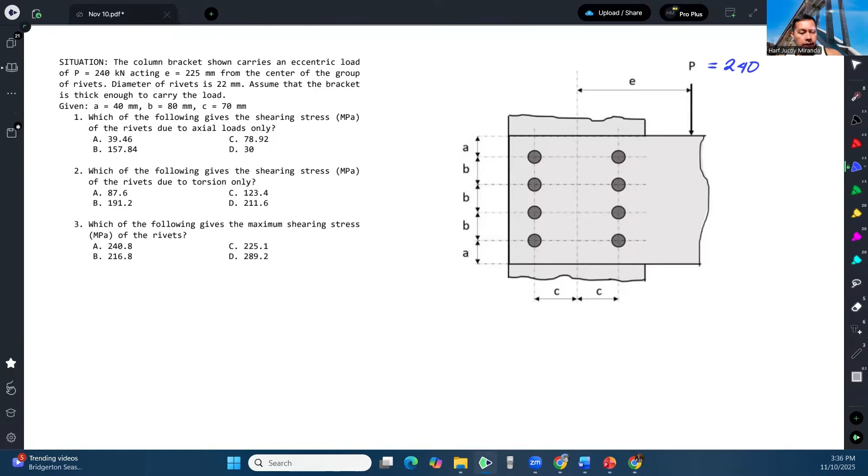All right, situation: the column bracket shown carries an eccentric load of 240 kilonewtons acting at an eccentricity E of 225 millimeters from the center of the group of rivets. So let's plug in the values: P is 240, E is 225. The diameter of the rivets is 22 millimeters.

Assume that the bracket is thick enough to carry the load. This statement simply means that we do not need to check the bracket itself against bearing, tension, or other limit states of the steel member. So for this particular problem, we will be focusing only on the rivets.

We are given A equals 40, B is 80, and C is 70.

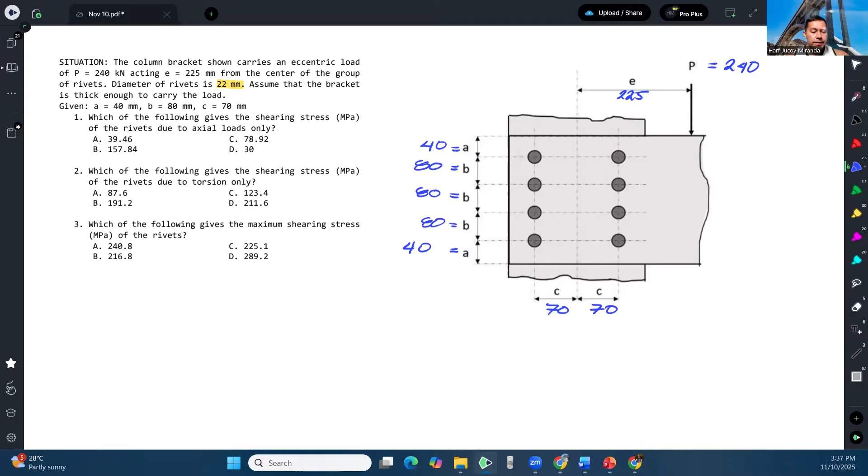For the first question: which of the following gives the shearing stress in megapascals of the rivets due to axial loads only? So what we need to familiarize ourselves with here is that first of all, these rivets have a bolt group centroid.

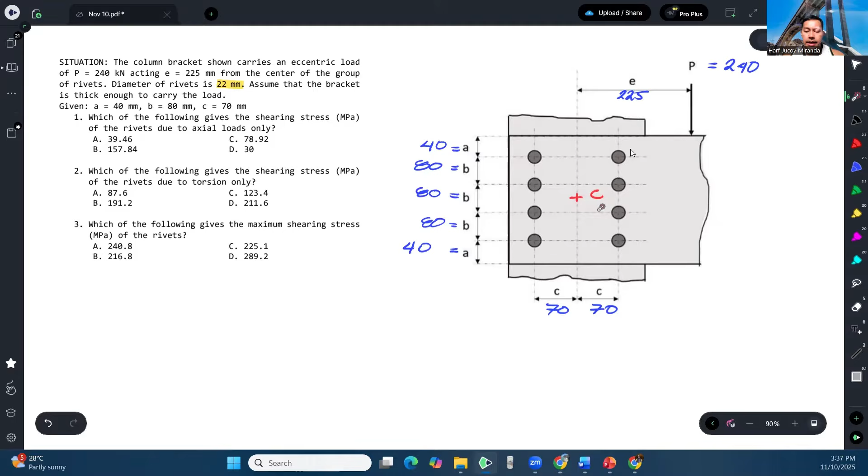And that centroid, because of symmetry, can be found here. So there's the centroid of the group. Because the centroid is there, then any distance from that point to wherever the force is applied gives us what we call the eccentricity. So eccentricity, remember, is always measured from the center of the bolt group.

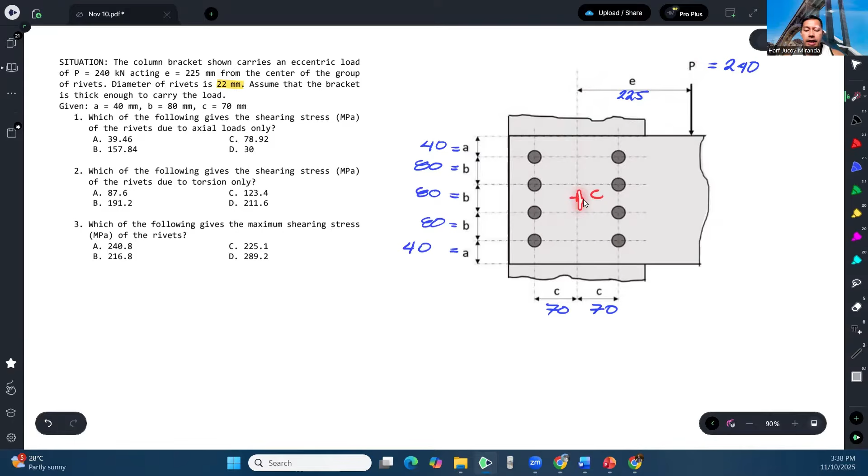Now, just in case the bolt group is not symmetrical, you can apply Varignon's theorem to determine the location of the bolt group centroid. Hopefully we are familiar with that. But anyhow, in this case, since the center is there, the distance from here up to here is our eccentricity.

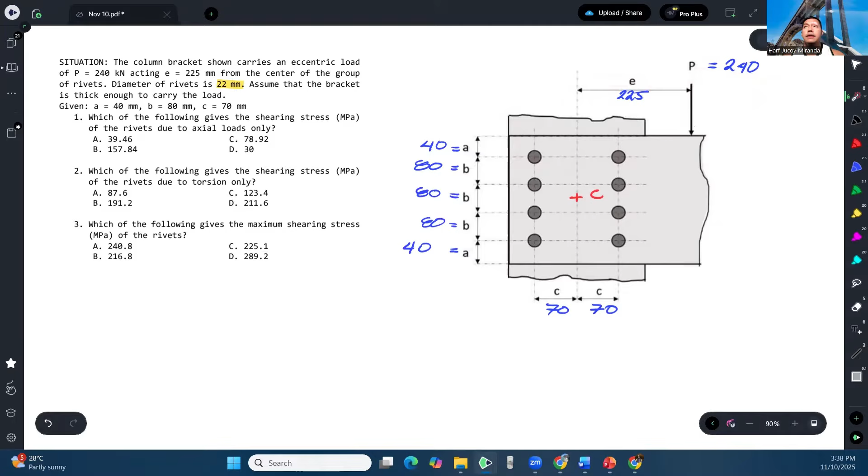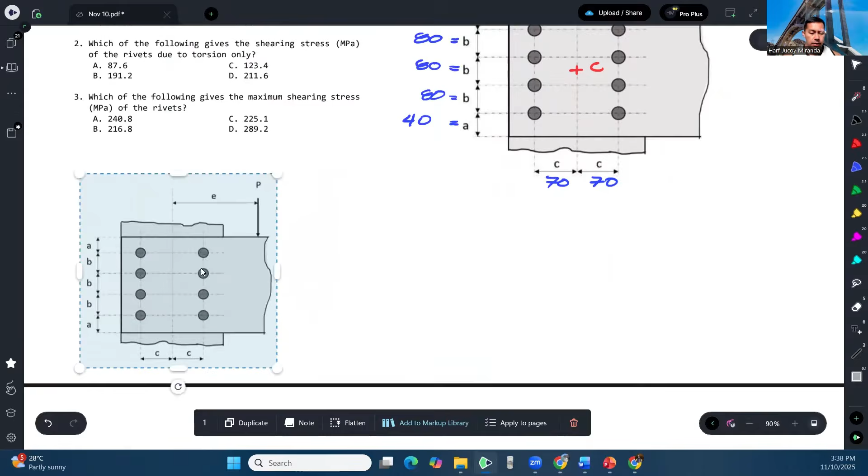Because of that, this force will have two effects on the rivets. One is the direct shear. That is when, let's put it here at the bottom — if we removed the force P here and put it directly where the bolt group centroid is, that is what we call the direct shear.

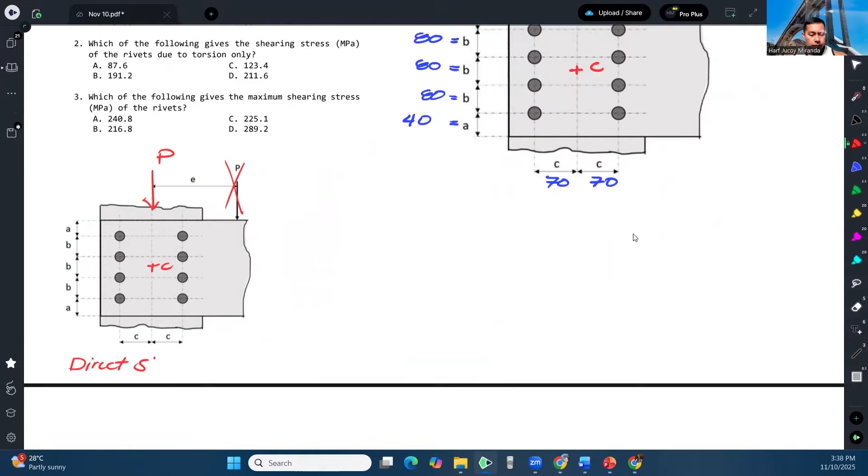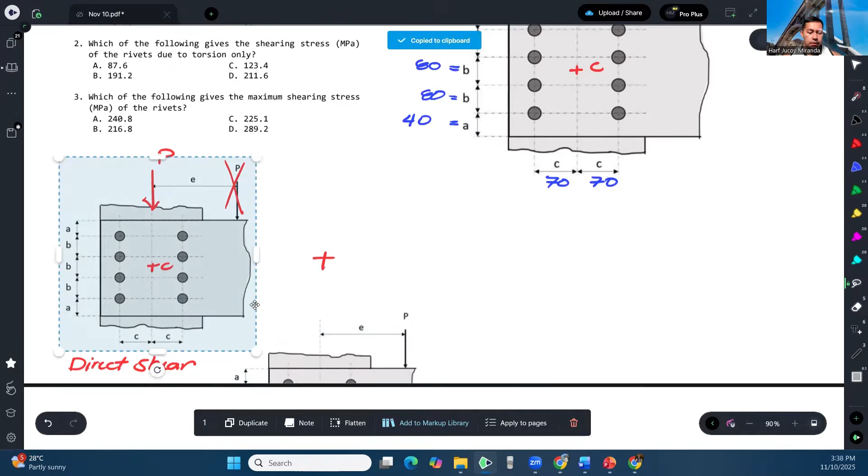And then, in addition to that, because of that eccentricity, we also have torsion. And the torsion will act at the centroid. This is due to torsion — torsional shear.

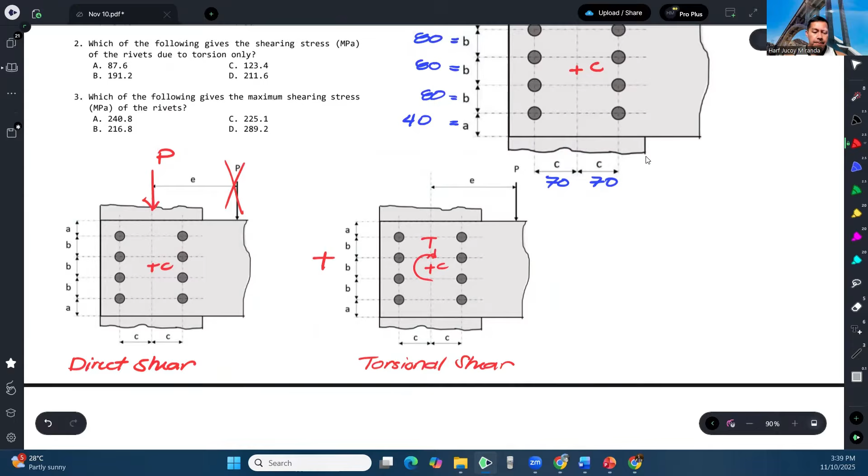So for the first problem, we are only asked for the shearing stress due to axial load only. So that's this one — due to axial load only, which is also the direct shear.

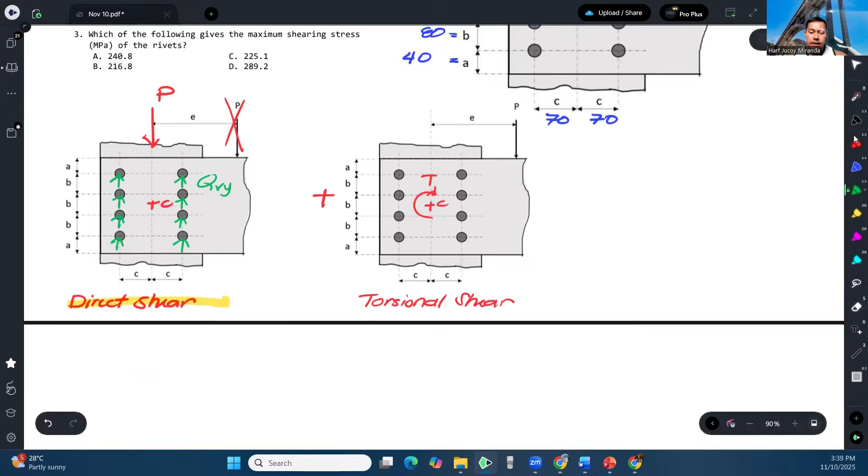We know that each rivet will react equally when the loading is direct or axial. So the reaction we'll call QVY, since it's directed about Y, becomes simply the direct shear reaction: P divided by however many rivets there are. The P given is 240 kilonewtons, divided by how many — we have 8 rivets.

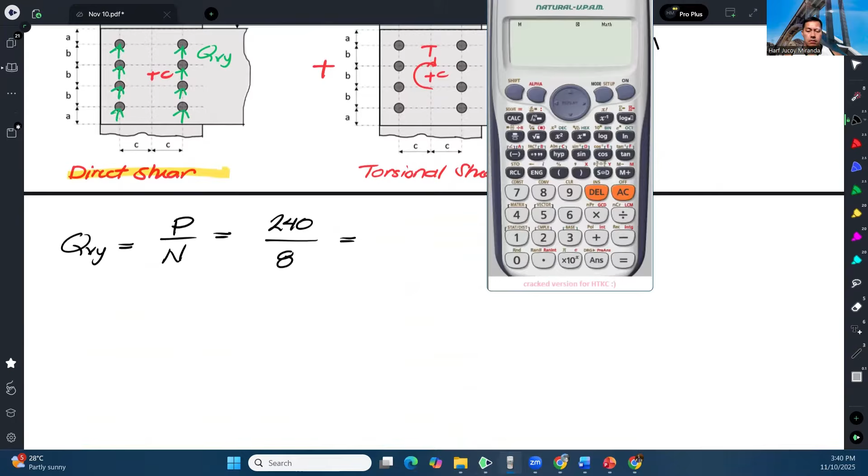So divided by 8, that gives us 240 divided by 8, which gives us 30 kilonewtons.

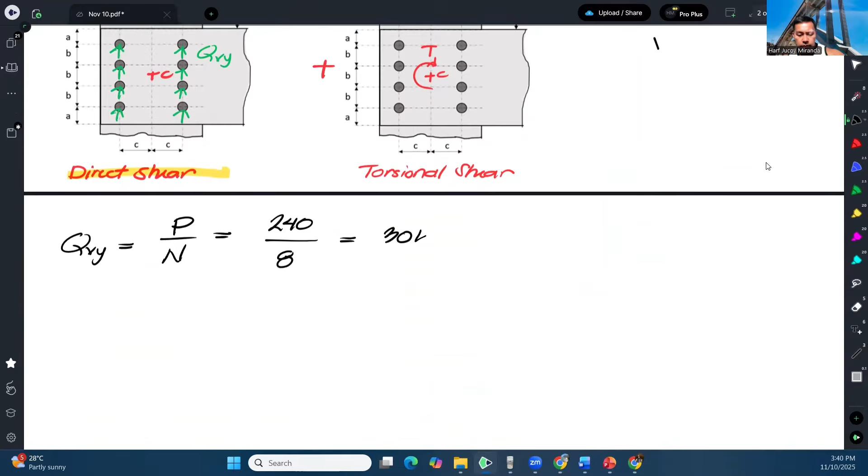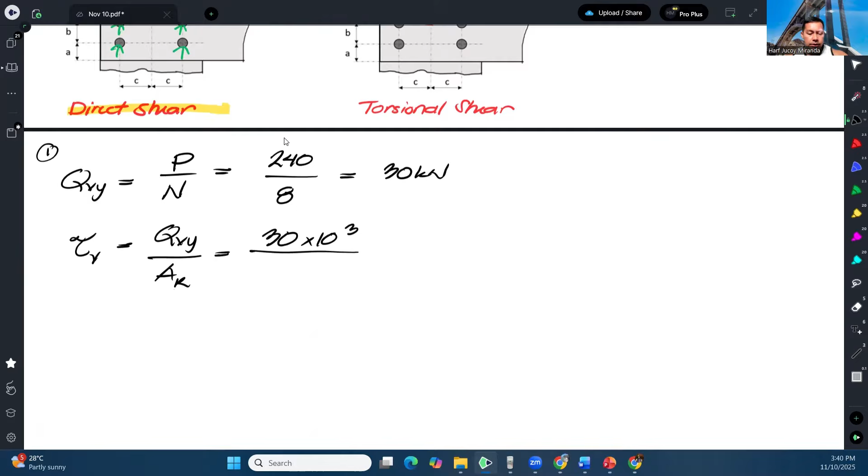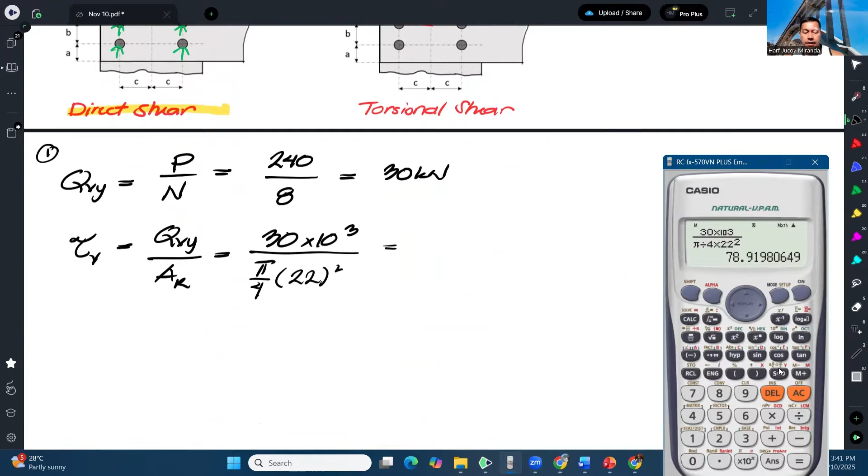But what's being asked is stress. So to get the stress for number 1, the shearing stress due to direct shear would be the force divided by the area of the rivets. That is 30 — let's convert to Newtons to get megapascals — divided by the area of the rivet, which is circular: pi over 4 times the diameter squared, 22 squared. That gives us 78.92 megapascals.

So for number 1, notice that it didn't specify which rivet is being considered. That doesn't matter because, as I mentioned, each rivet has an equal direct shear being applied or resisted against the axial load. So it doesn't matter which rivet we're talking about for number 1. Anyway, our answer here is letter C.

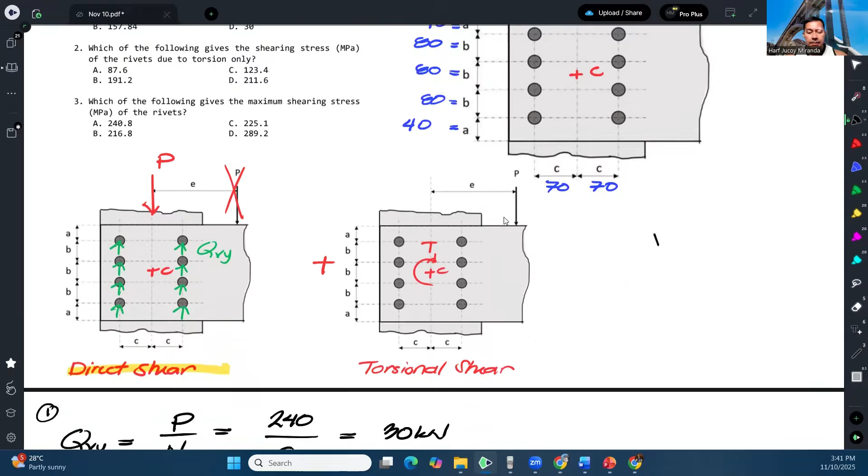For number 2: which of the following gives the shearing stress of the rivets due to torsion only? This means we now need to find the shearing stress due to torsion only. Actually, for number 2, it also doesn't specify which rivet we're talking about.

But I want to mention now that for torsion, the reaction of these rivets will differ depending on where they are located. And the idea is: the farther the rivet, the greater its shearing stress; the closer the rivet, the smaller the shearing stress. The reason for that is the formula for torsional shear.

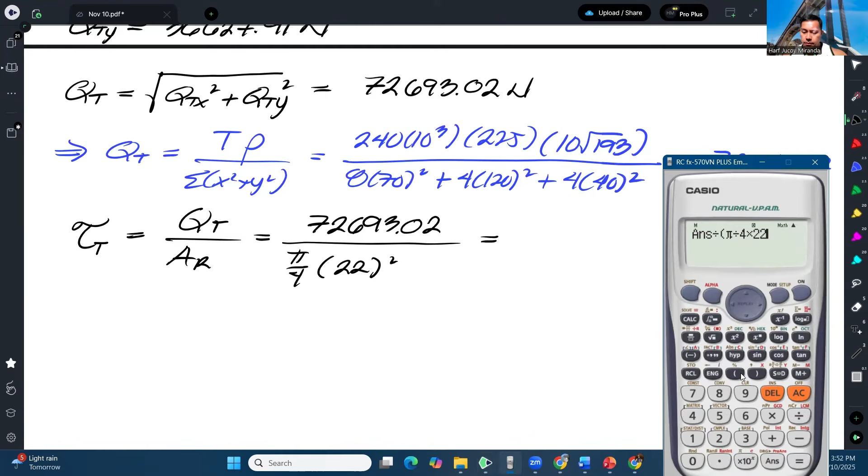72,693.02 over pi over 4 times 22 squared, and that is 191.23 megapascals.

So our answer for number 2 would be letter B.

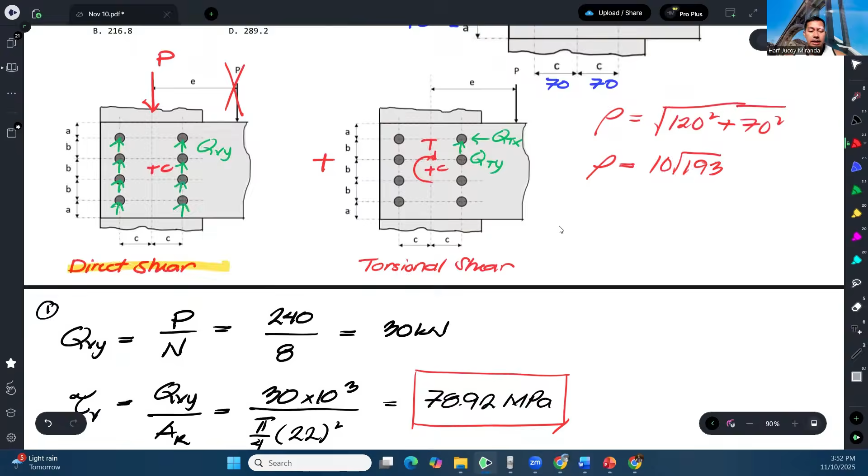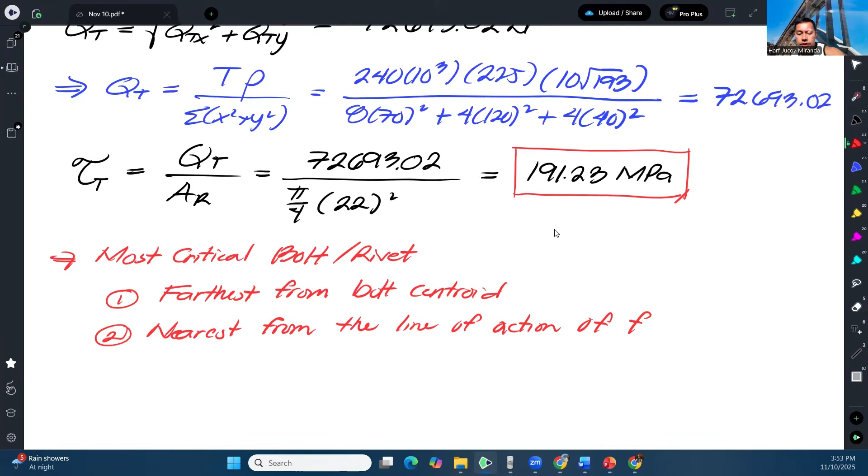The most critical bolt or rivet could be identified using the following two criteria: first, it is farthest from the bolt or rivet centroid; second, it is nearest from the line of action of the force.

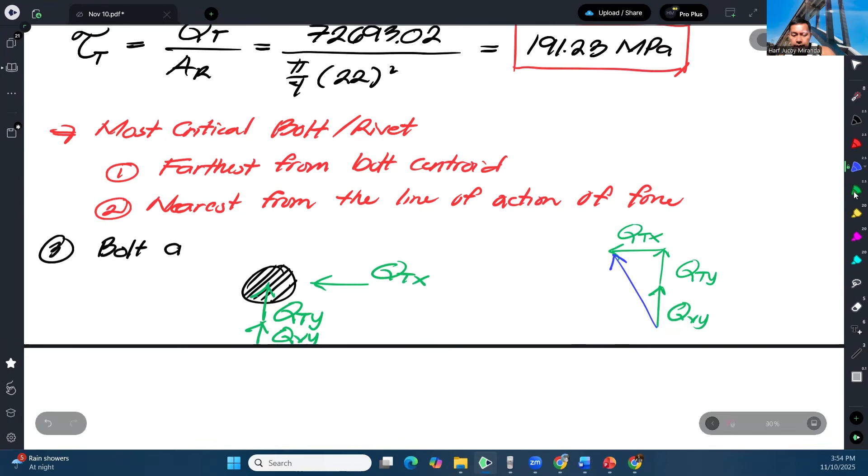To compute for that resultant of bolt A, that is just the square root of QTY plus QVY squared, adding the Y components, plus QTX squared.

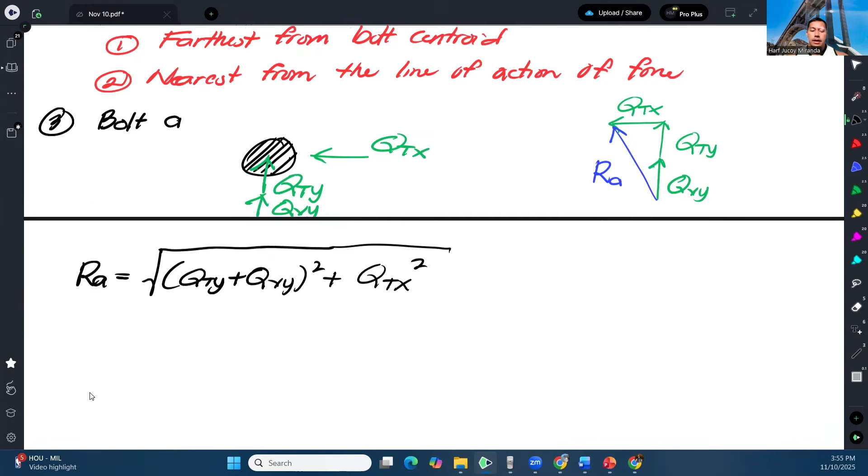And from there, we have the square root of QTY, which is 36,627.91.

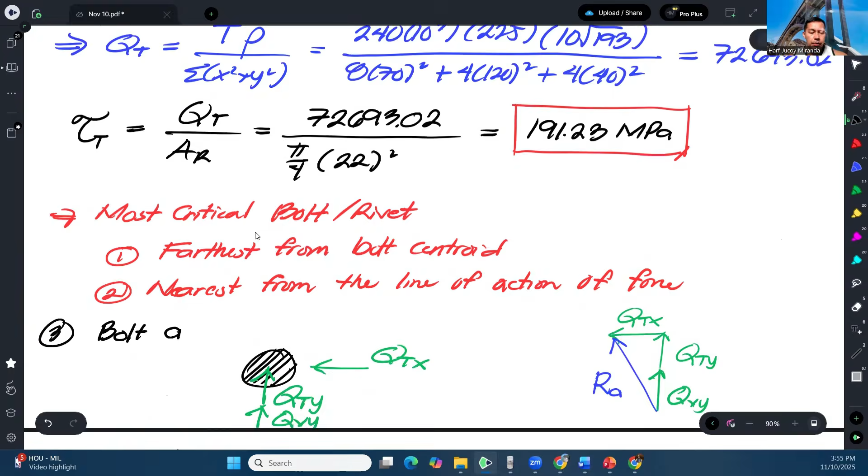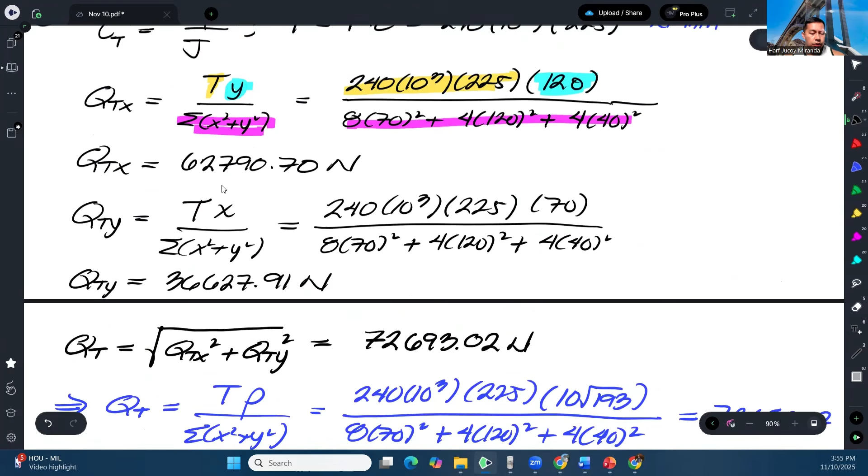Plus QVY is 30 kilonewton, so we convert that to Newton, 30,000 Newton squared, plus QTX which is 62,790.7.

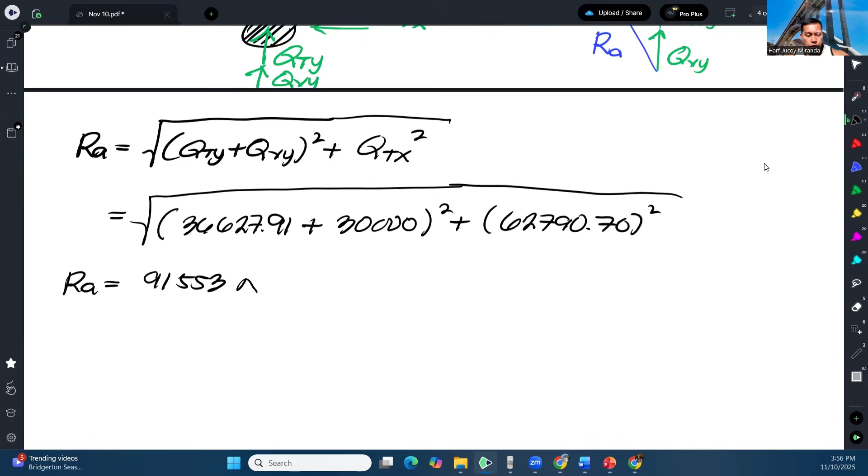Therefore RA, or the total reaction on the bolt due to the combined effect of shear and torsion, is 91,552.53 Newtons. Now the total shear stress will be RA divided by the area of the rivets.